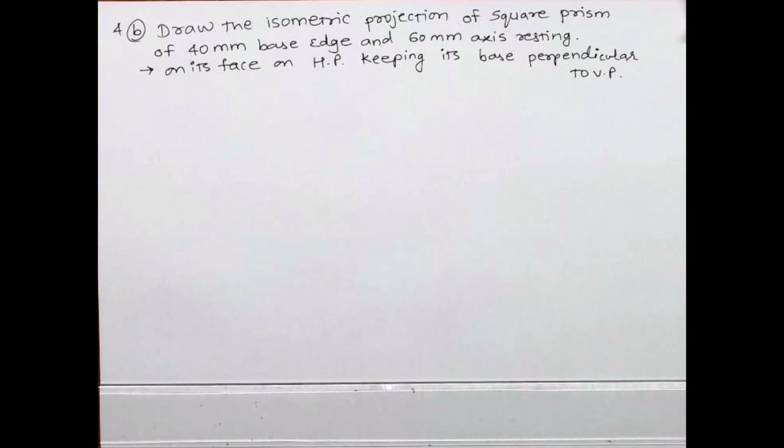Welcome to Technical Drawing. Today we'll see how to draw isometric projection of a square prism of side 40 mm base edge and 60 mm axis, resting on its face on HP. So this is very important: resting on its face on HP and keeping its base perpendicular to VP.

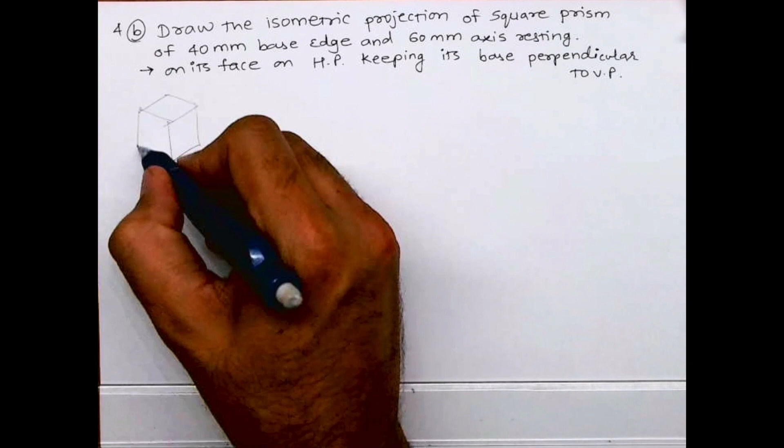So this is a square prism. So what they mean, this is face. So it is resting on its face on horizontal plane, and they have said its bases are perpendicular to VP. So what we will do, we will draw square prism like this.

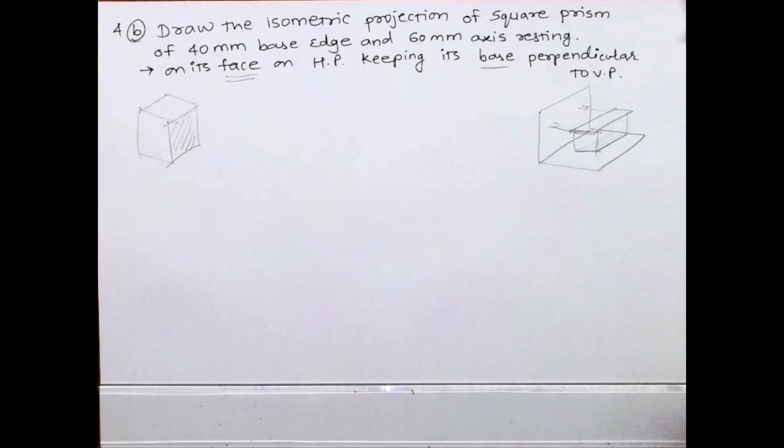Now if you see in this, it is resting on its face, right? And base. So this is base. This part is base. There are two bases. One is ahead, one is behind. So both are perpendicular to VP. So this is HP, VP. This is direction X from where observer is watching.

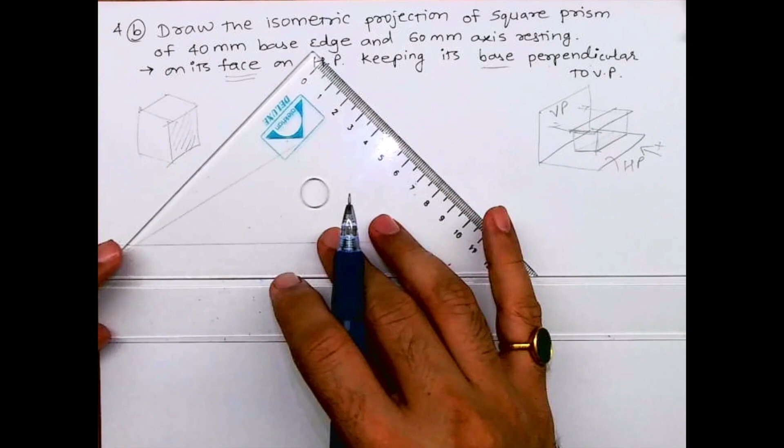So what we need to do, same standard procedure. First we will draw isometric scale. Make sure you draw it properly with all the labelings and all. So you draw 30 degree, then you draw 45 degree. Then we have to mark 60. So we'll mark 0 to 50 and 10. That's what we required. We'll draw vertical line. So we'll get isometric length.

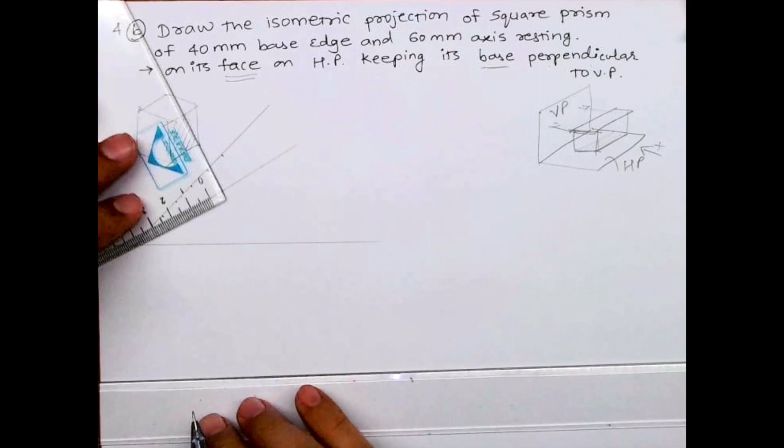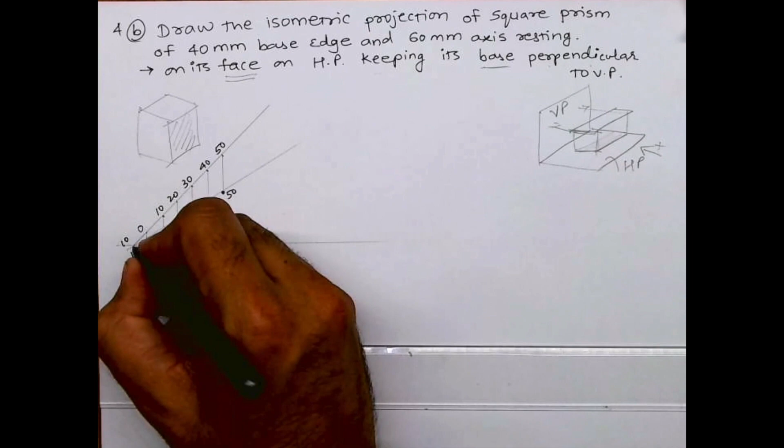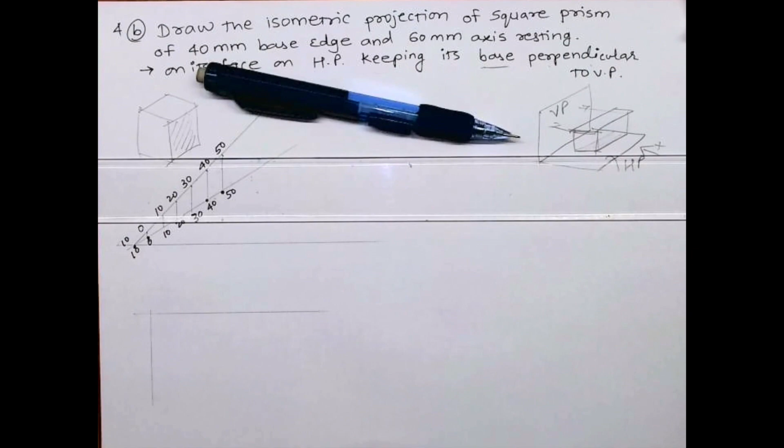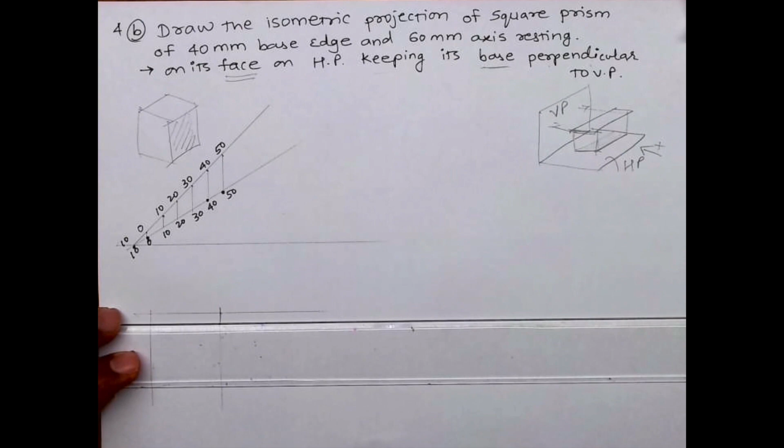Then again we'll draw a helping figure, that is rectangle. So this is 60 and this is 40. We'll take 40 and we'll cut. And from here we'll draw a vertical line, and from here we'll draw a horizontal line. So we got a helping figure which is rectangle.

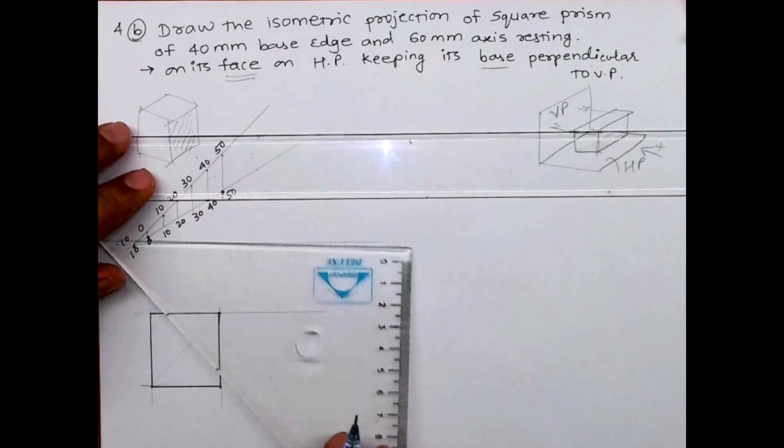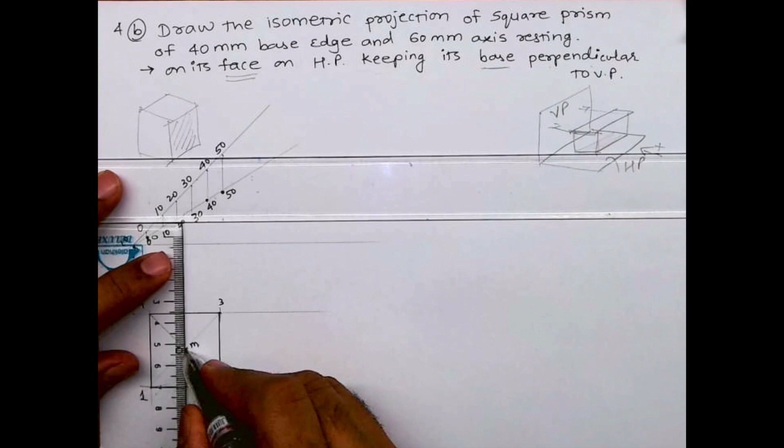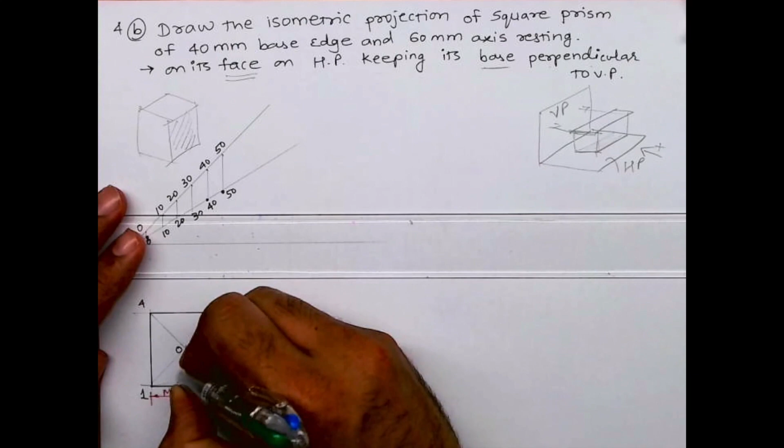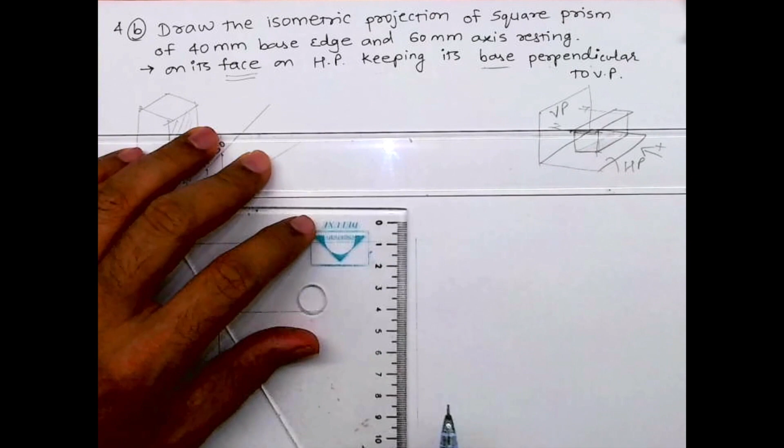This is 1, 2, 3 and 4. This is OM. And this is M and N when we need to transfer axis. That time we required MN. So always remember, whenever I'll be drawing any isometric projection, I'll be drawing box 1, 2, 3, 4 and axis M and N. I'm going to keep this constant so you will be able to recollect it.

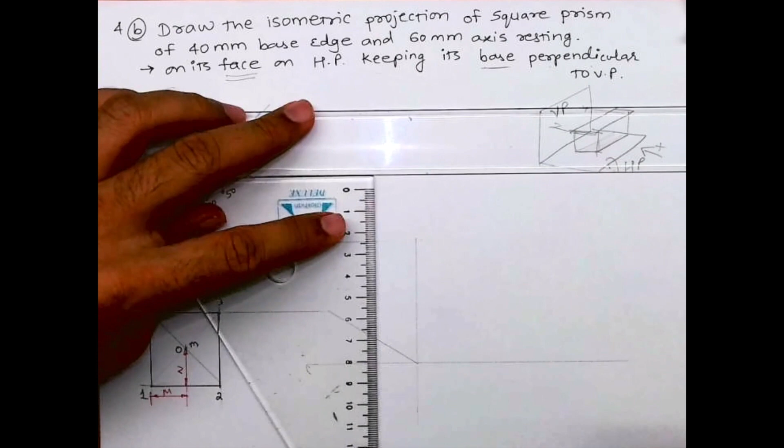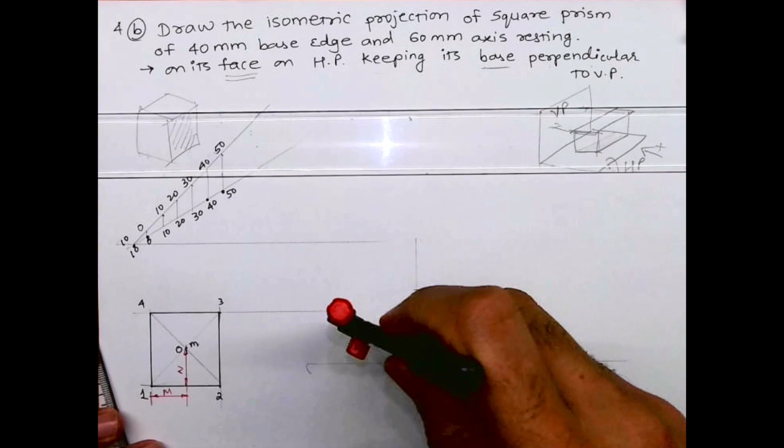So now this is point 2. Now we'll take 2 to 1, 2 to 3 and 2 to 1 will cut. Then we'll draw a vertical line and one more line like this.

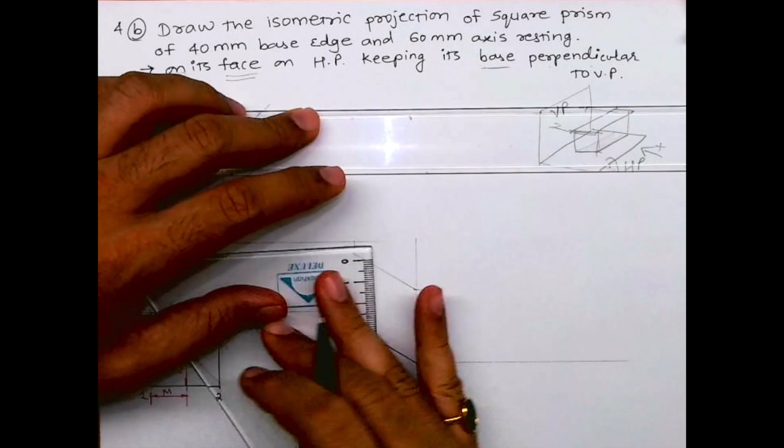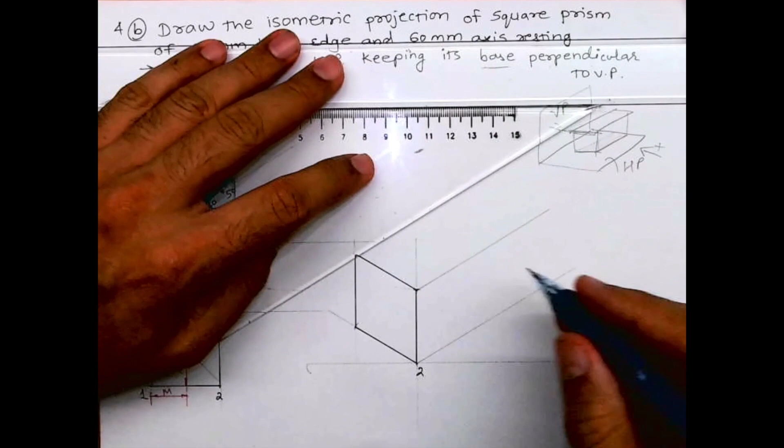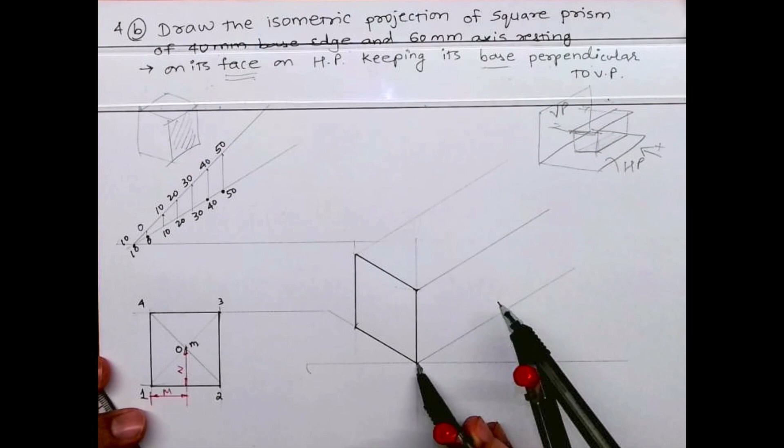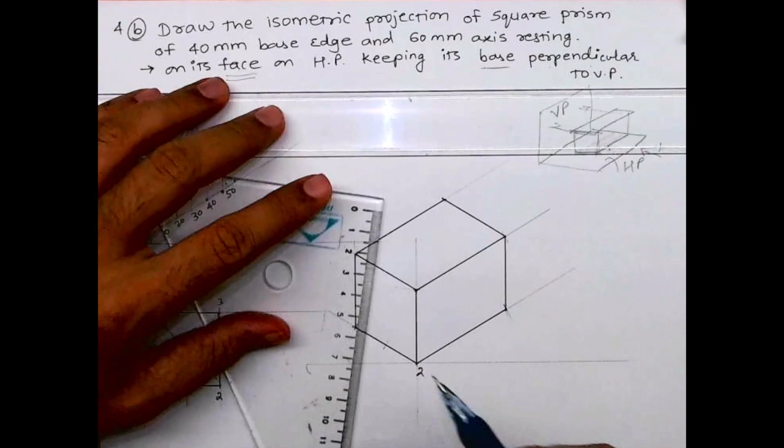Now we take this behind. How much you will take this behind? According to axis, the axis is 60. So we'll take 60 and we'll cut here. After drawing this, we'll mark M and N. One to M, the distance M, and then vertical line, and on that we'll mark N, distance N.

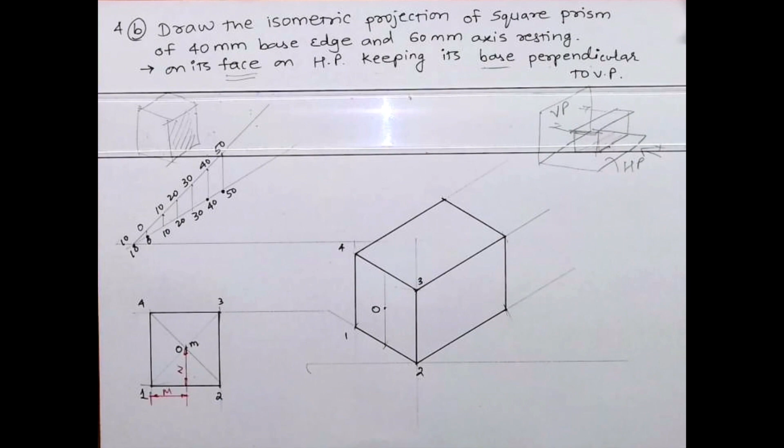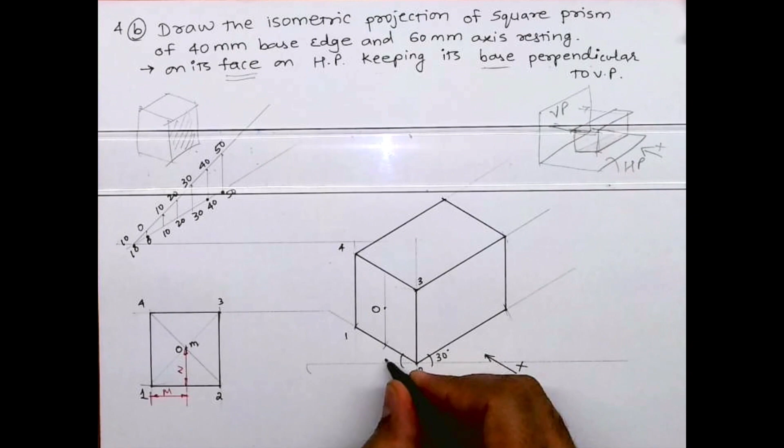So this is O, 1, 2, 3, 4. Now we need to take this point O behind. This is direction of viewing. O, 30 degree. Remember that direction of viewing is at an angle of 30 degree. From here we'll take axis behind from O. How much it would be? 60. So we'll take the distance.

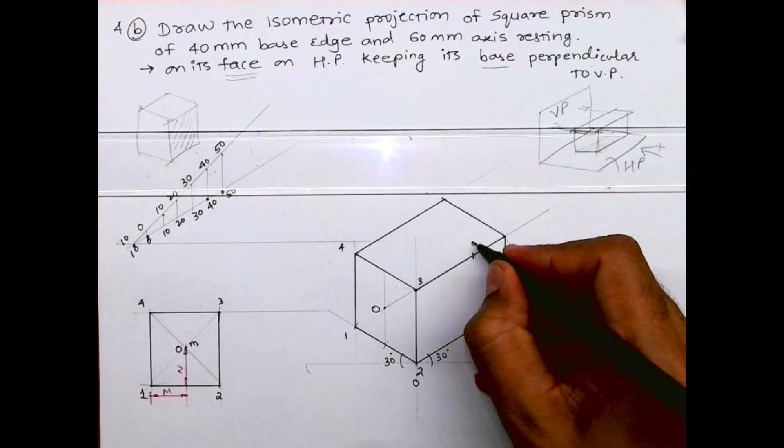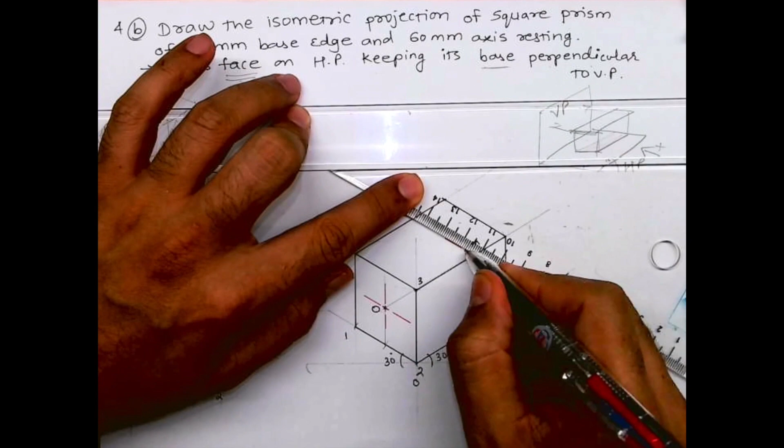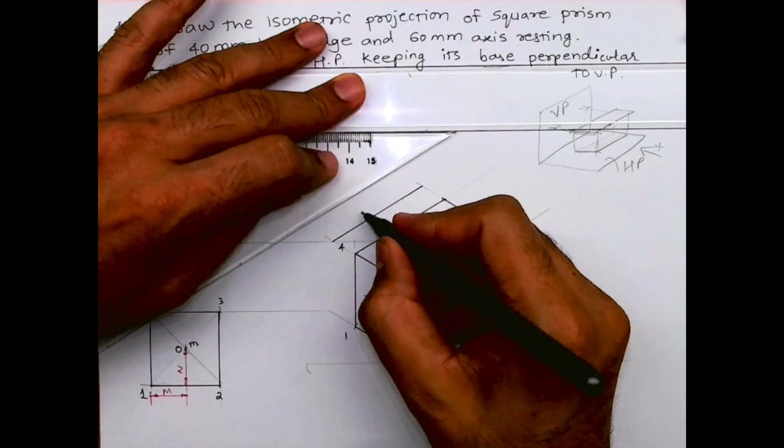Remember, we are doing isometric projection, so all dimensions will be less than the original distance. That you should keep in mind. Now this is OM. We can mark axis like this. So this is how you will get. You can mark axis. O to M you can show. You can mark dimension, that is 60-40.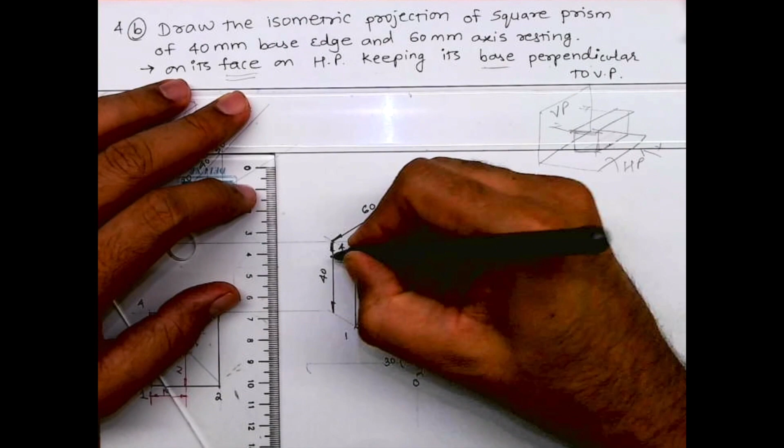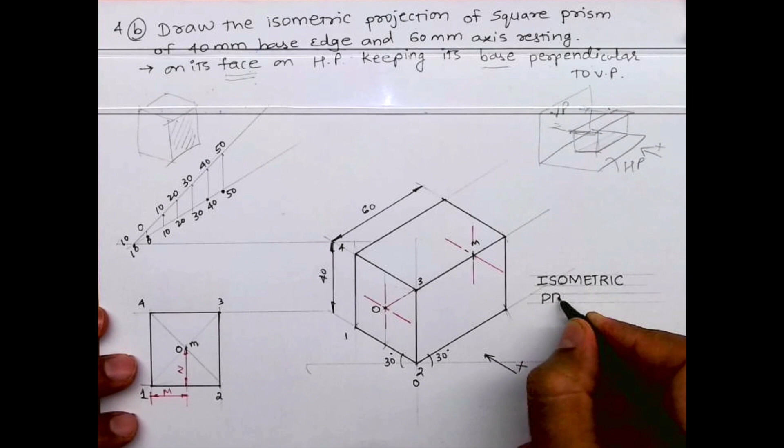And then you can write isometric projection in guideline. Always remember, in engineering graphics or engineering drawing or in technical drawing, whenever you write anything on paper, it should be always capital, and it will be in guideline like this. So we'll write isometric projection.

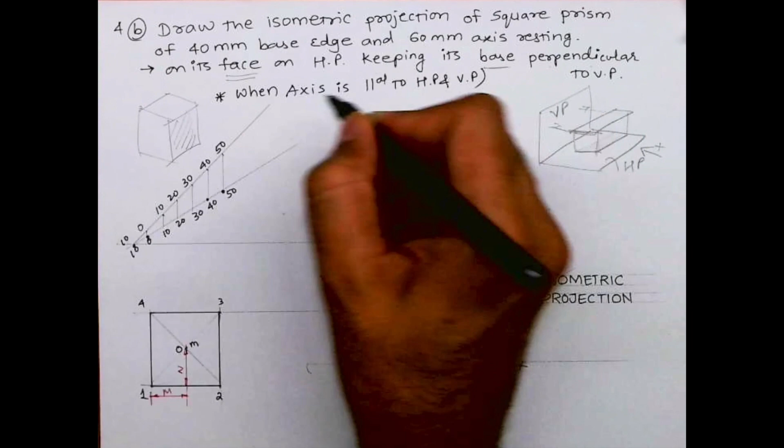Now there is one more thing, that whenever you see such kind of sum, right? So over there we can write when axis is parallel to HP and VP. This condition also is correct. If you see, this axis is parallel to HP as well as VP.